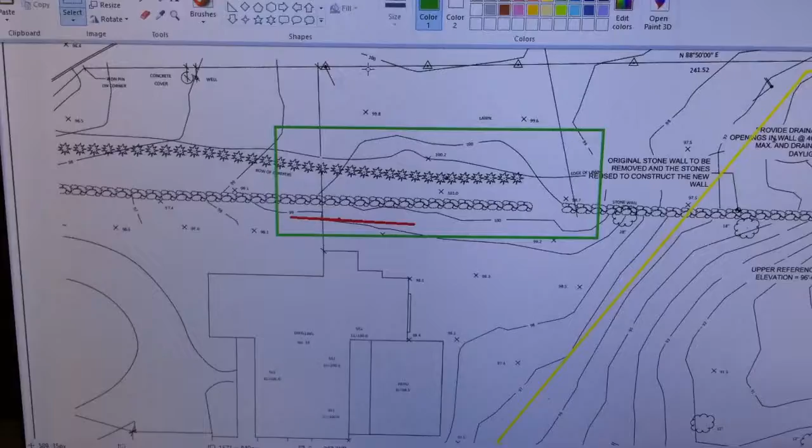This was the grading plan you sent over. I spent some time reviewing this and thinking about how the new grades would lay out after doing some excavation. So obviously all the stone wall would be repurposed to the back. In this area on the side of your house, the grade is almost flat, right? If you remove this wall, it's going to look funny to have this hump of lawn, like a raised area in the center. You'll notice the grade goes up in this area, roughly 25 to 35 feet wide by almost 80 to 100 feet long.

In that area we'd have to dig down. So the concept would be to have the grade slope from this area down into this area.

The issue is over here you have ledge, and this ledge area is a higher elevation than your patio. So no matter what, you're going to have the water slope from here going this direction, and from here going down this direction. Over here there's natural slope going down to the driveway, so there's no issue.

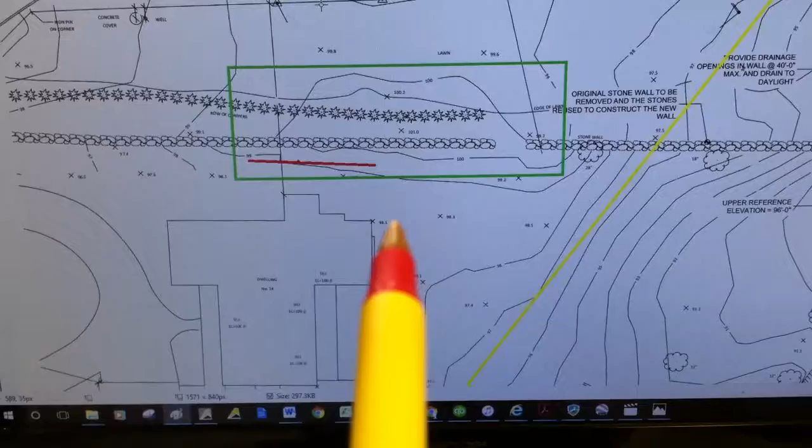But where the red line is, we're going to have to put a series of catch basins, a drainage system, so we can relocate the water in a pipe to extend down towards the woods. This is the area where you'd have catch basins, probably 2 or 3, which would carry through a pipe under the ground, either to the corner of the house to connect to the leader drain, which I don't think is going to work, but more likely it's going to end up having to extend all the way down over here into the wetlands area.

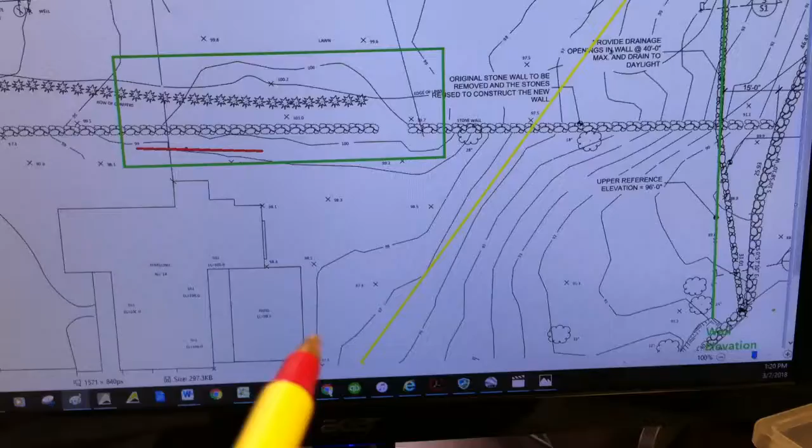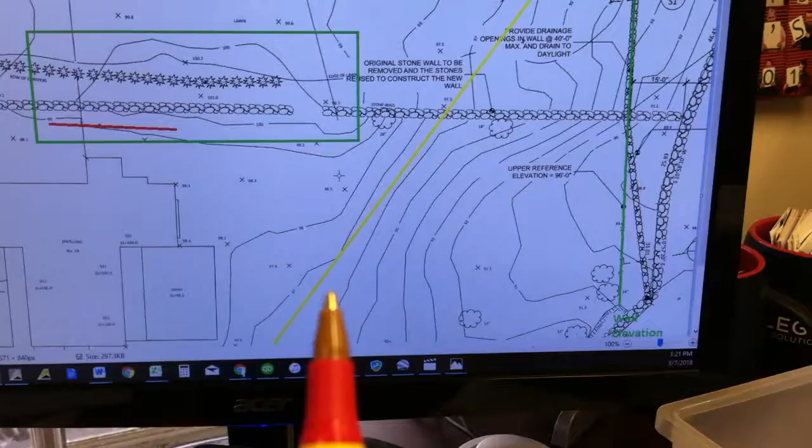Okay, so the next thing is your starting elevation is basically your patio elevation, and you're going to end up having to slope all the water towards the back. In that scenario, you're going to have the slope starting around 97.5, and it's going to slope down to somewhere between 93 to 94. You need about 2.5 feet of pitch from here to here just for the water to move.

It's going to be a little bit more aggressive than that, but to your eye it's going to look level. So again, the wall elevation would be 93 to 94, which makes the wall somewhere around approximately 5 feet tall from here to here.

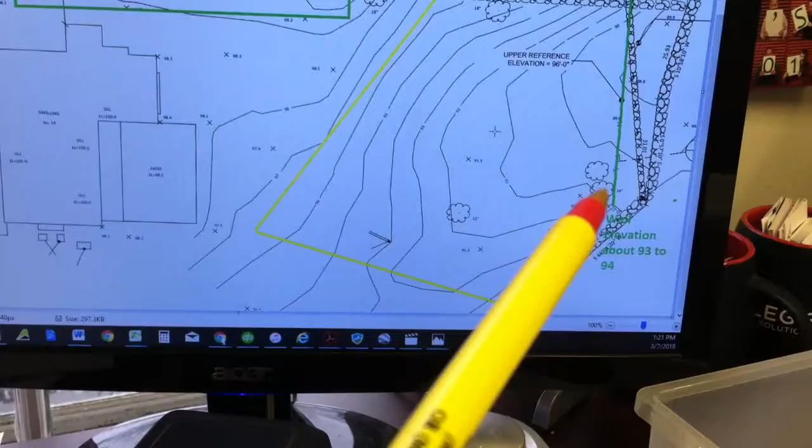And then as the grade goes up, obviously the height of your wall is going to be a little bit lower, but this wall should be relatively level, and then this wall would kind of die into the grade up on this level. So the height of the wall would start around 4.5, 5 feet here, and then go down to nothing at the end, to a 0 height at the end.

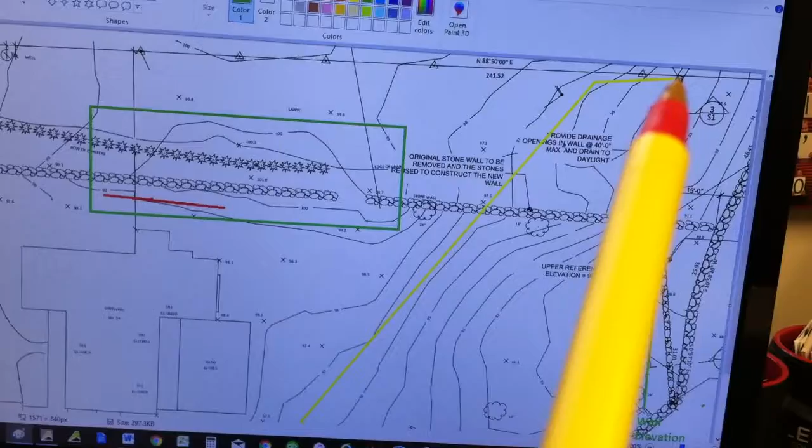The yellow mark kind of shows where we're adding all the fill. So this whole area we'd have to add fill, which is expressed in my proposal about how much you need. Some fill you're going to pull from here and put in this area, but you're going to need to bring in fill as well.

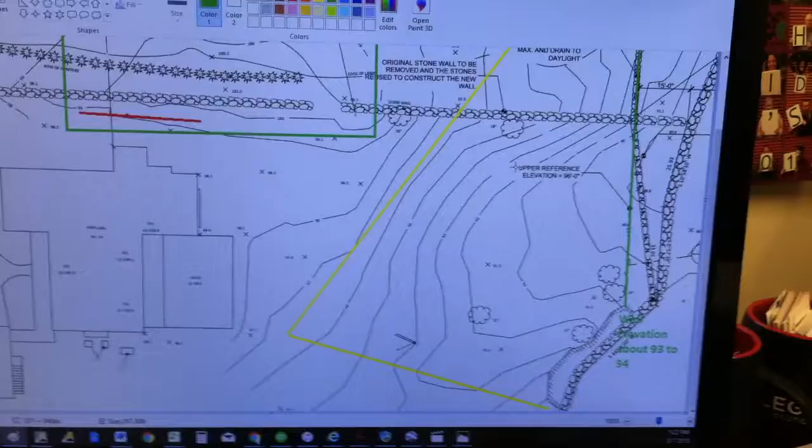So the big thing I propose that's going to make a major change in your cost — I would avoid having to do a wall taller than 3 feet in this area, because if you go over 3 feet, you're supposed to have it engineered, and if it's not engineered, it's going to be much more expensive than a wall with a little bit less height.

So if this is 5 feet originally, to make it perfectly level, all you have to do is, over the course of 6 to 8 feet, from where the pen is to there, slope it down to make up the elevation change. For example, you'll have the elevation start here, slope down very gradually. Over the last, say, approximately 6 feet, you'll have more of a steep slope, where you could put plants in front of the wall if you wanted to.

That's going to save you a ton of money, because then you don't have to put a crazy deep footing like an engineer would typically make you do. There's really no functional or aesthetic advantage of building a taller wall than you need to in the back, and I think 3 feet is perfect — you don't have to get it engineered, and it lowers your cost by almost more than half for the wall.

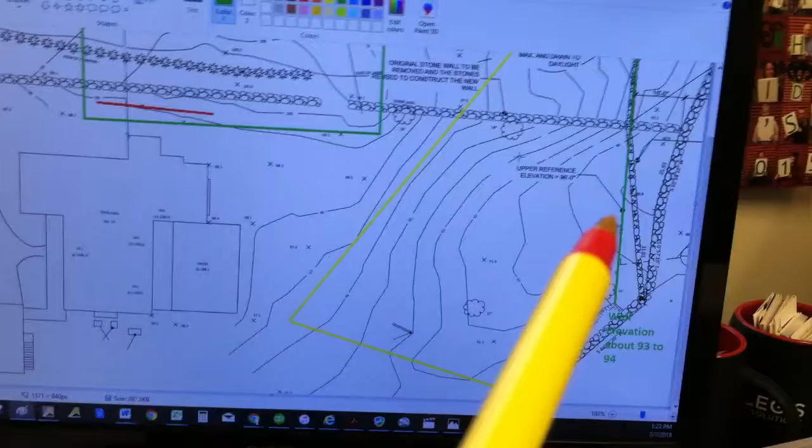Okay, so you'll notice I gave you 2 options on the proposal, whether you want to go full height or whether you want to do a little bit reduced height so you don't have to get it engineered. Let me just pull up the proposal one more time, make sure there's nothing else I want to describe to you.

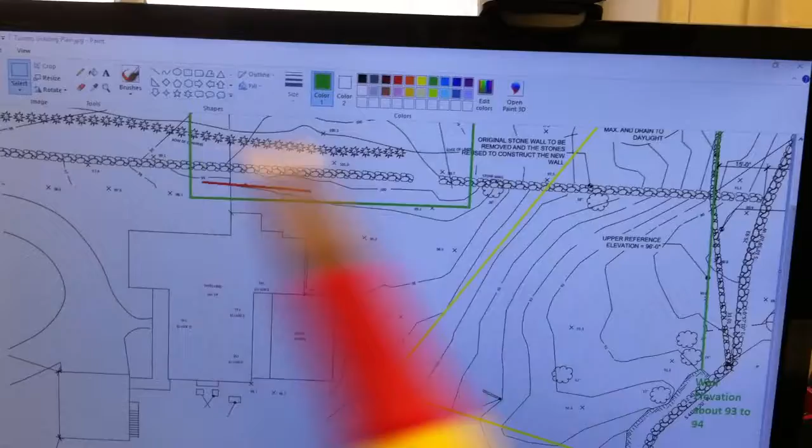Let's see here. When you're in this area, you start excavating down. If you get large boulders or rocks or ledge, then obviously you're not going to be able to cut the grade there — you're just going to have to work with the grade as it is.

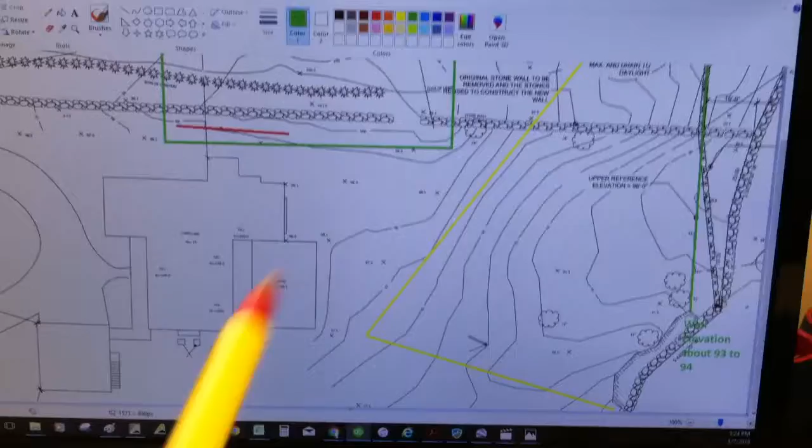You are going to end up having to remove some trees. You might decide to leave this tree here, which won't necessarily change the grade here. But there are a bunch of other trees you have to remove, so figure there's going to be an associated cost to that. I did give you some sense of budget in my proposal, even though that's a different company that would be doing that service.

We're going down through here. I get the fill, I get the topsoil. I measured the area for the topsoil to give you a good budget for how much you're going to need.